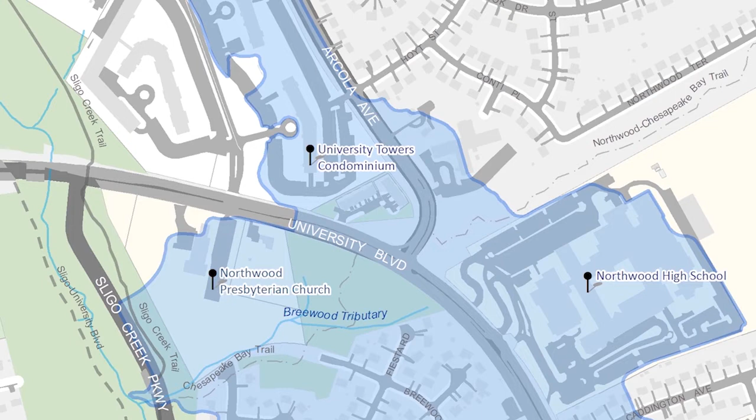In 2009, the Montgomery County Department of Environmental Protection embarked on a multifaceted effort to reverse decades of neglect and improve water quality and habitat conditions in a small tributary to Sligo Creek called the Breewood Tributary. Located east of Wheaton at the intersection of University Boulevard and Arcola Avenue, the Breewood Watershed encompasses 64 acres of high-density suburban development that drains into the Breewood Tributary.

Take a walk along the Breewood Tributary today, and what you will see is not at all how the stream looked just a short time ago.

A neglected stream. In 1951, the Breewood Watershed consisted only of farm fields and forests. The following 20 years brought big changes to the watershed. By 1970, the houses, high-rises, schools, and roads that currently exist were built. Development in the county during this time did not include stormwater management. Impervious surfaces like roads, parking lots, and rooftops in the watershed went from almost zero in 1951 to 26 acres, or 42% of the watershed area, by 1970.

Unmanaged stormwater runoff from these impervious surfaces flowed directly into the Breewood Tributary, causing an increase in the frequency of flooding and erosion of the stream channel. After 4 decades, the stream was severely eroded, with vertical stream banks as high as 13 feet. It's estimated that 2,667 cubic yards, or 267 dump truck loads of dirt, eroded into the stream channel during this 40-year period. On average, that's 1 truckload of dirt dumped into Sligo Creek every 2 months.

A little help from friends. Through a collaborative effort involving multiple partners that included Montgomery County Parks, Friends of Sligo Creek, University Towers condominiums, Northwood Presbyterian Church, and residents in the Breewood Manor neighborhood, DEP implemented 5 projects in the Breewood watershed to address uncontrolled stormwater runoff and poor habitat condition in the stream itself. The 5 projects are University Towers and Northwood Presbyterian Church Stormwater Retrofits, Breewood Road Bioretention, Breewood Manor Green Streets, Breewood Stream Restoration, and RainScapes Projects on private property.

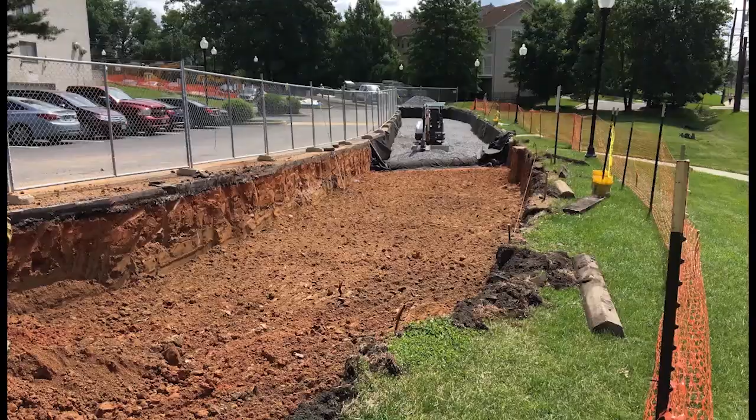University Towers and Northwood Presbyterian Church. Working together with residents at the University Towers and members of the Northwood Presbyterian Church, design plans were prepared for 13 small-scale stormwater management facilities. 12 facilities were installed at the University Towers and provide stormwater treatment for 3.7 acres of the 4.4-acre parking lot.

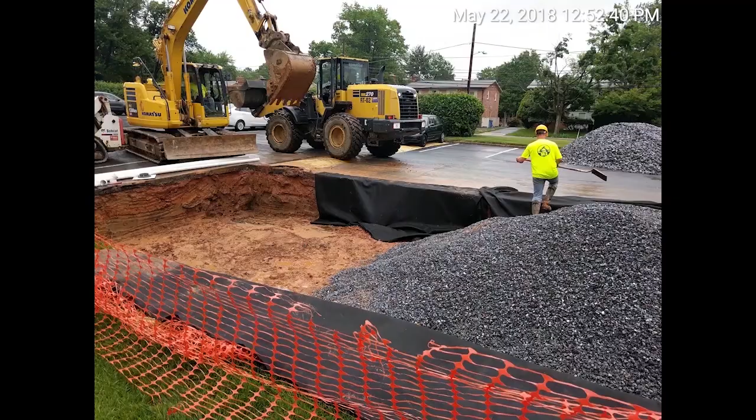Doug Marshall is the project planner with DEP and has worked on this project since the beginning in 2009. Excavation under the pervious concrete panels went to a depth of 4 feet and was then backfilled with gravel. An underdrain was installed to ensure water drains out of the pores in the pervious concrete panels, thereby preventing damage to the concrete from freeze-thaw action during the wintertime.

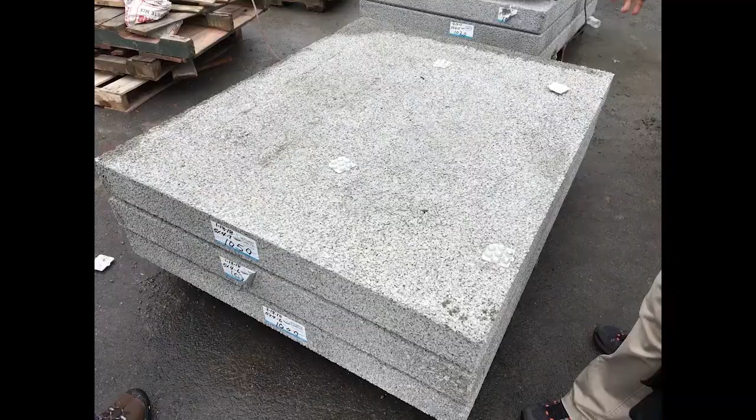The gravel reservoir under the pervious concrete panels has enough storage capacity to hold the full water quality volume, or 1 inch of rainfall over a 24-hour period. Our observations during the 2 years these pervious concrete panels have been in place have shown that they're performing well in capturing the stormwater from a total of 1.22 acres of parking lot pavement.

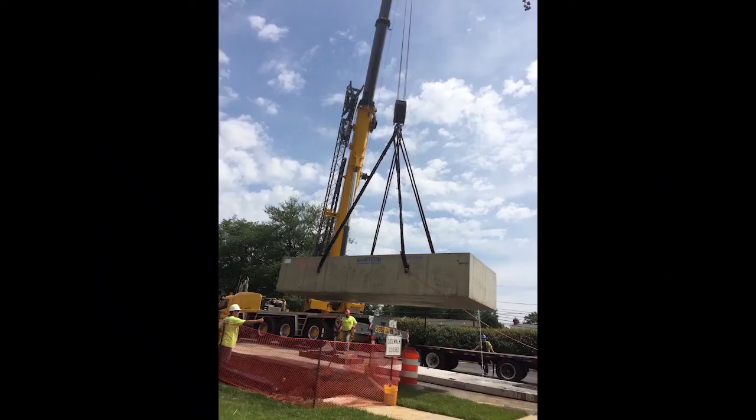6 tree boxes were installed at University Towers, which altogether provides water quality treatment for 1.9 acres of the parking lot. The impervious drainage area to each tree box ranges between 1/4 and 3/4 of an acre. Because of the relatively large impervious area draining to the tree boxes, we opted for a pre-treatment chamber to capture sediment and debris, keeping it from clogging the tree box filter media.

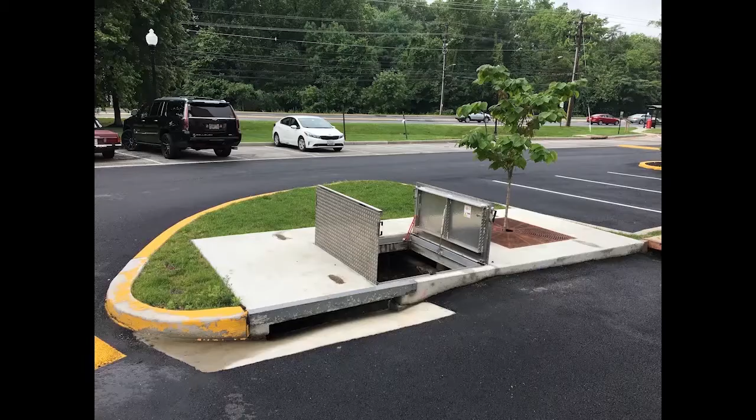Here's one of the tree boxes with the access doors to the sediment chamber open. Debris collected in the sediment chamber is easy to access and clean during routine maintenance visits. Through coordination with property management, we were able to have scheduled repaving of the parking lot delayed until after all LID practices were installed. When repaving did occur, we were able to include small modifications to ensure proper drainage to the tree boxes, such as the small concrete swale.

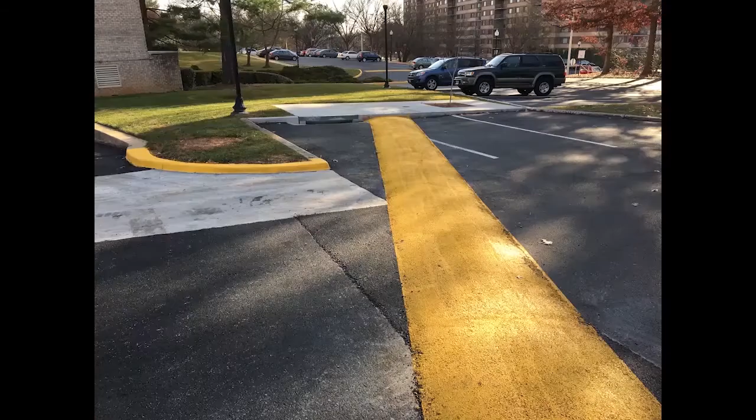Some of the speed bumps in the parking lot were relocated to direct stormwater into the tree boxes. In this case, we were able to have the speed bump installed at an angle to direct water to the tree box, which, as the video shows here, is working well.

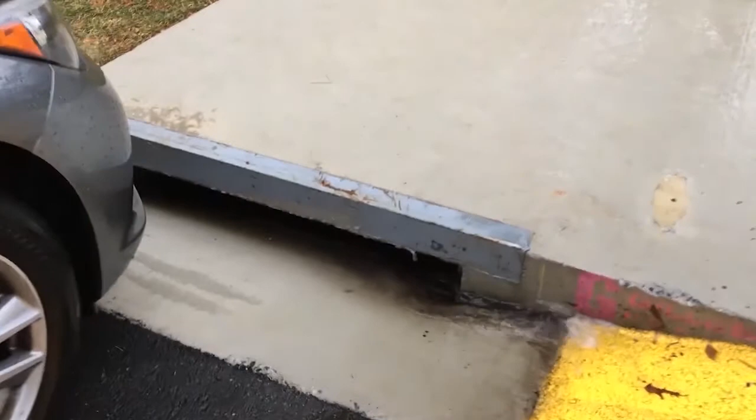2 bioretention gardens like this one and 1 rain garden were installed at the University Towers, which provide full water quality treatment for a total of 0.67 impervious acres.

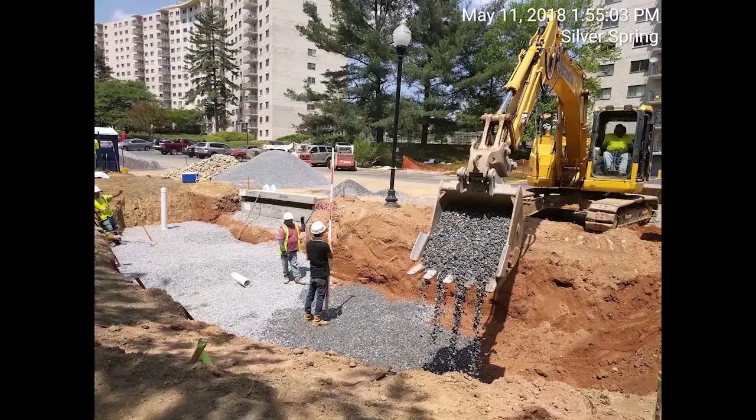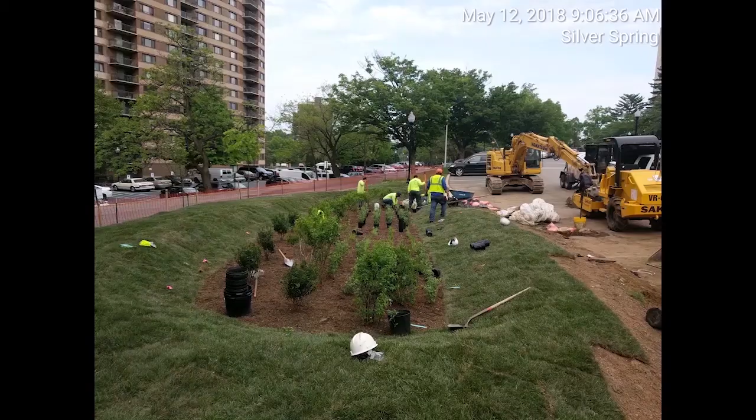Here, one of the bioretention gardens is excavated to a depth of 5 feet and then backfilled with 15 inches of gravel and 2 to 3 feet of soil media, comprised of equal parts topsoil, sand, and mulch. The bioretentions and rain gardens were planted in 2018 with 2 shrub species, inkberry and winterberry, and 4 herbaceous perennials.

Switchgrass, blue flag iris, goldenrod, and aster. This is one of the bioretentions after 1 year's growth, and this photo was just taken recently in June of 2020. Here's the rain garden after 1 year's growth, and here's the rain garden now in June of 2020.

LID offers a great opportunity to educate the public about stormwater issues. This is one of the signs that we post at our LID practices. This particular one is next to one of the bioretention gardens at University Towers, and here is one of our smaller signs posted next to the rain garden.

Moving on to the Northwood Presbyterian Church, where one bioretention facility was installed, providing stormwater treatment for the entire parking lot. The bioretention at Northwood Presbyterian Church has enough storage capacity for the full water quality volume, or 1 inch of rainfall in 24 hours.

Soon after the bioretention was installed, it was put to the test as we experienced a heavy thunderstorm that produced 1.1 inches of rainfall in less than 1 hour. The storm filled the bioretention to capacity and was just beginning to flow out the overflow riser. All water captured in the bioretention had drained down through the soil media by the next day.

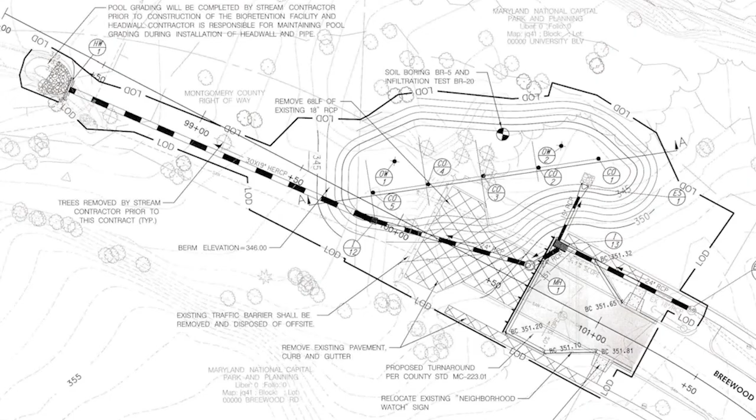To make space for the bioretention, 1,800 square feet of pavement was removed, as illustrated by the crosshatched area on this plan sheet. 50 feet of roadway was removed and a new cul-de-sac was constructed. Excavation was to a depth of 5 feet, which was backfilled with gravel and soil media.

Groundwater monitoring during the design process indicated the water table was approximately 10 feet below the surface. However, during excavation of the bioretention, groundwater was encountered, which forced us to make two design modifications: one, a perimeter drain was installed around the bioretention to keep the work area dewatered during construction; and two, upturned elbows were added to the underdrain to prevent lowering of the local water table.

During periodic inspections since the bioretention was completed, we have not seen water draining from the upturned elbows, indicating that all water entering the bioretention is infiltrating underlying soil. Ongoing flow monitoring in the storm drain pipe upstream and downstream of the bioretention should help us better understand the hydrology. These are the upturned elbows.

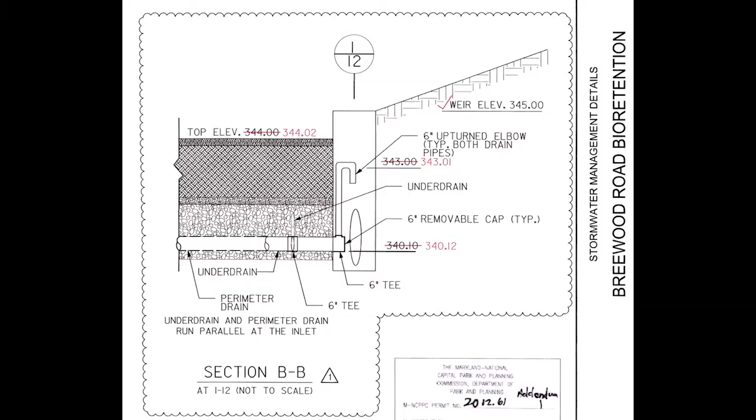Note the removable cap at the end of the underdrain pipe at the bottom of the concrete riser. This gives us the flexibility to dewater the planting media if standing water or soggy media becomes a problem. To date, after 3 years, we have not had a problem with the bioretention not draining properly.

Plant growth in the Breewood Road bioretention has been exceptional, as this series of photos shows. Several large canopy tree species were planted in the bioretention, including sycamore, swamp white oak, red oak, and river birch, which are helping to dewater the soil media.

Signage explaining restoration efforts in the Breewood Watershed is posted alongside the Northwood hiking trail, which passes by the Breewood Road bioretention. Construction of this project was completed in May of 2017.

Breewood Manor Neighborhood Green Streets. 10 bioretention and rain garden facilities were designed and installed within the public right-of-way along Breewood Road, Fiesta Road, Tenbrook Road, and Tenbrook Court. Combined, these 10 Green Streets practices provide stormwater treatment for 1.8 acres of impervious surface.

Ann English is DEP's RainScapes Program Manager. I am going to talk about Breewood Manor's Green Streets Gardens renovation and the residential properties that were done through the RainScapes program. When the initial work was done on Breewood, there was quite an extensive amount of analysis, and the effort was to see how much runoff from private property could be diverted into some sort of green infrastructure RainScape garden.

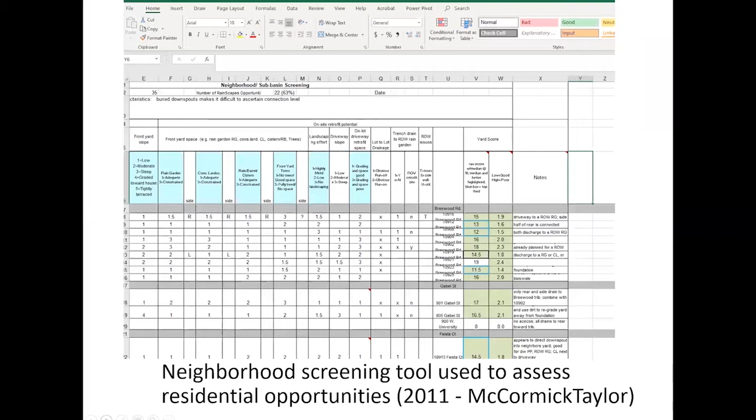An extensive screening tool ran the numbers and figured out that 63% of the properties had opportunities. Unfortunately, we got a much lower percentage of participation because it was an older community, and it really was like cold calling. They didn't know they had a problem, or they thought they might want to move.

They weren't anxious to make landscape changes, but we did manage to get 3 properties to agree to allow us to install gardens. I'm going to show you that gardens looked one way when they went in, and then some of them have gotten better over time and some have not.

This garden is adjacent to the big bio in Breewood, directly adjacent to it, but it gets a lot of deer pressure because it's right next to the stream, and stiltgrass has really invaded this. In spite of that, the mountain mint has done all right, and so have some of the other wood asters that bloom through the stiltgrass.

We miniaturized the trench drain used in the road in Breewood and put it on a driveway and into this rain garden in the front yard, which is highly visible and is across from several different gardens in the right-of-way, which we then retrofit back in 2017 after the initial 2014 installation.

This garden is well loved, but the owner has now moved the native plants we installed to the background and installed a fig as well as hostas, which he prefers in the rain garden itself. They are growing fine, but there probably should be higher plant density than he is allowing.

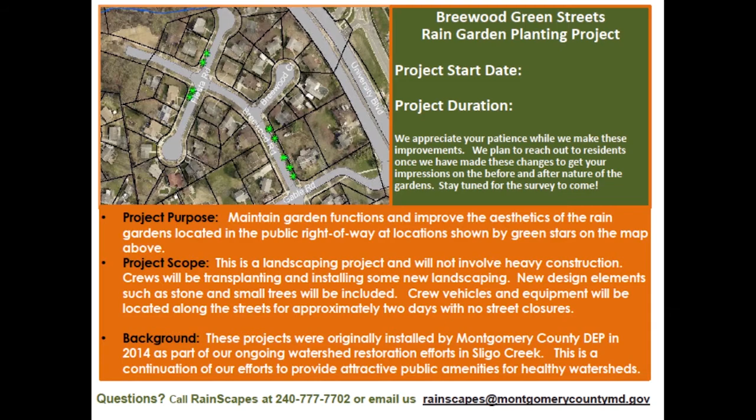This was done very rapidly. We started in April and May of 2017, and by the end of May the gardens were renovated. We sent out a flyer showing people where it was going to be, which gardens were going to be renovated, and proceeded from there.

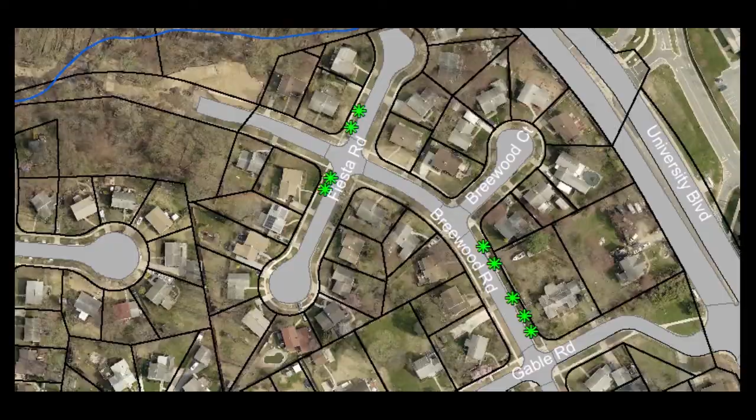The initial garden was selected even though other gardens might have been in rougher shape—these edges were clean, but the vegetation had been eaten by deer. It was in very poor condition in terms of providing green cover rather than mulch cover. The steep side slopes were being undercut, the sod was starting to collapse, and that didn't look like anything people like to look at in winter. The standpipes, which were observation wells, were very noticeable, and people would prefer they had some winter interest.

So we went with 3 different garden ideas. One, which I will show, I'd call suburban stream valley. The second would be a classic garden. And the third, a novel idea, was really trees—to create a streetscape and see if we could, with ornamental trees, create something more appealing without breaking the bank.

These 3 approaches were developed in-house by the RainScapes designers, my planners and myself, and then we got to work. This was Fiesta North, which I'm calling Suburban Stream Valley because it was very close to the stream, in a very suburban setting, and it was going to be a little more casual. The edges were still going to have a step out of grass—we weren't really modifying the slopes, but we were going to take off some of that sod and reinforce it because it was collapsing in a number of places.

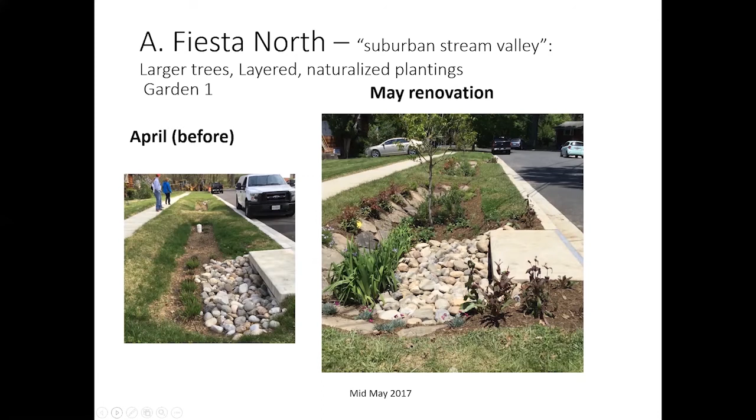We armored the slope where we took out the sod, and then we added evergreen shrubs and evergreen ground covers interplanted in those stones, creating a green living layer on the bottom. We also moved the sod away from the edges of the inlet so it wasn't so hard to mow, creating a garden edge rather than a hard edge.

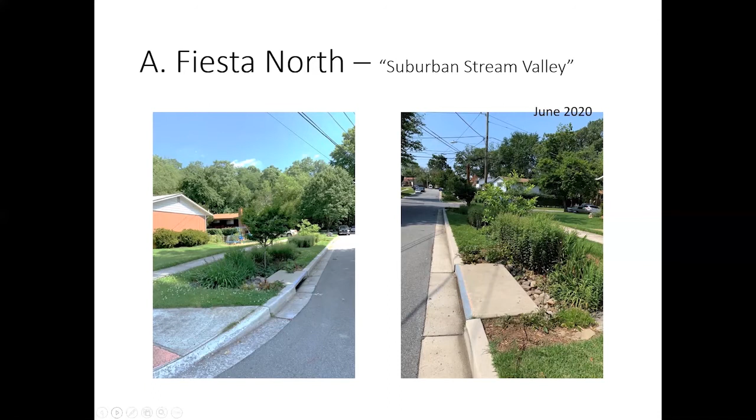This suburban stream valley concept has filled in beautifully. The trees have grown well. We used a hackberry, and you can see the Magnolia virginiana—so we used bottomland plants. We used goldenrods and rudbeckias, and it's really full after 2 years, which is a big contrast to what happened the last time after 2 years.

Just across the street, Fiesta South, is a classic garden. So you have these 2 gardens that were installed very separated from each other. They had to step out. There was some erosion on the grass, and the shrubs were small, and there was a lot of open space. Even though it was clean, it wasn't very well covered.

So in April, we got to work, and the goal was to unify this and turn it into a unit, to make it a garden that would be set off. So there's a layering system that was designed in. And again, we used the idea that the inlet would have irises like on Fiesta North, and the inlet edges would be garden-esque rather than turf to concrete.

And then the biggest thing we did was add in these flagstones to make a pedestrian connection from the road to the sidewalk, rather than forcing them to walk through grass, allowing them to feel like they're walking through a garden rather than avoiding falling in the pit.

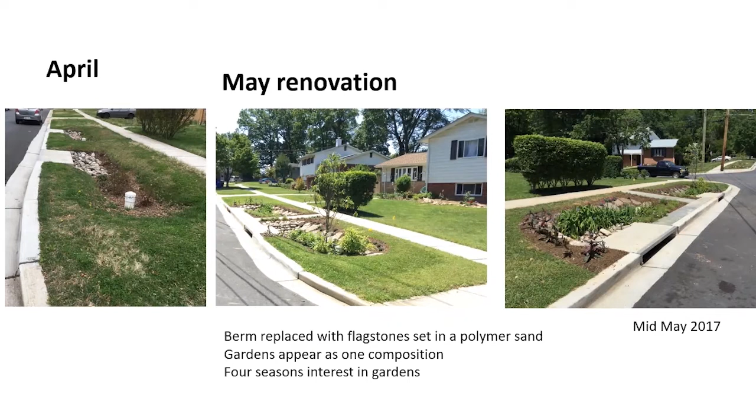In June of 2020, these gardens have done spectacularly well. They create 4 seasons of interest. They have beautiful flowers, and in the winter, there's something to look at. This was a fairly low-cost renovation for a big, big impact. And actually, there are some really high-quality weeds coming up between the flagstones—some of the penstemons have decided they like to grow there too.

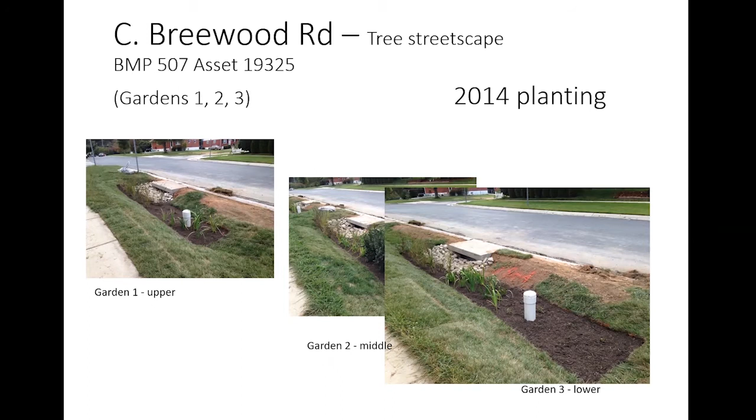So then on Breewood Road, there are 5 gardens in a row, and they were all very steep and narrow. We did not reinforce the slopes with stones because that sod seemed to be in pretty good shape, but you can see this is how they were planted. And then the gardens in 2016, they actually didn't look terrible, but they were starting to get more and more sparse, so every year replacement plants were having to be added.

Some of the shrubs had survived, and so we were really trying to figure out, what's my problem solver? How am I going to get through this? So what we did was we added trees. We had never added trees into rain gardens before, and we knew the bottom was going to be an issue, so we put them on the side slopes.

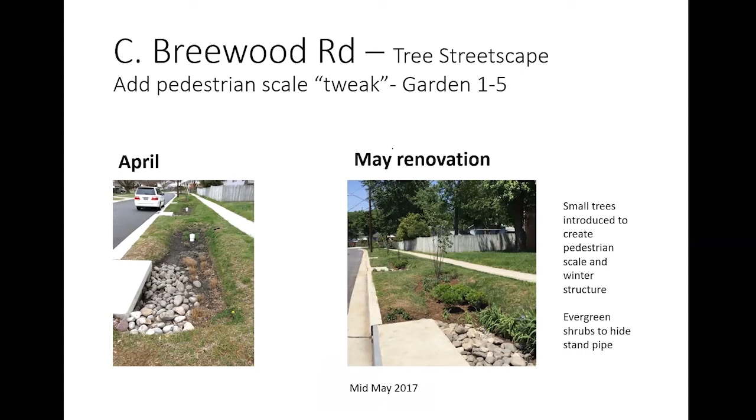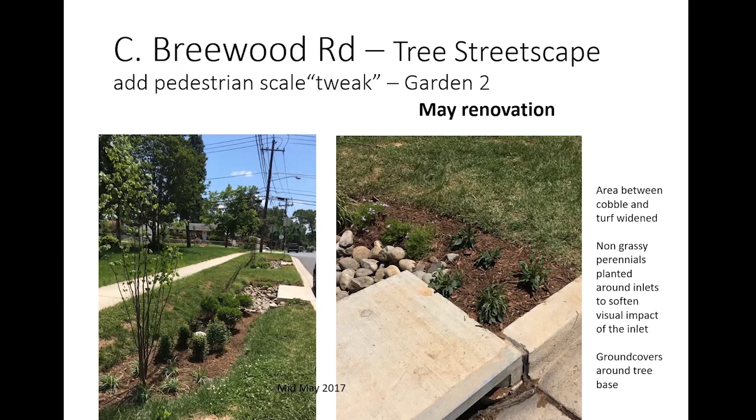We created a repetition of patterns to unify the whole streetscape. So rather than be just a muddy mess for about 2 months of the year after the grasses got cut back, we alternated switchgrass and irises down the road. We had 3 redbuds and 2 serviceberries as the trees, and we also used some Ilex glabra, and added in sedges. We added dwarf cultivars of black-eyed Susan, trying to create a feeling of canopy along a very open, sunny street.

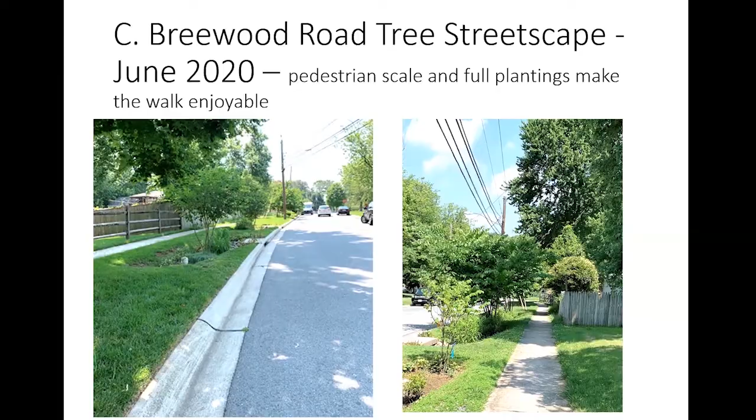So now in June, the pedestrian scale has been introduced. It's a pleasant walk. There are pockets of shade created by the new trees that are filling in nicely in the garden, and the ground layer is complete. We feel that between the residential areas and the streets, this has been a big uplift for the community, and we hope to do more work in many more neighborhoods.

Construction of the Breewood Manor Green Streets was completed in May of 2015. Breewood Stream Restoration: The Breewood Tributary originates from 2 stormwater outfall pipes that convey water from University Towers, Northwood High School, and University Boulevard. Following decades of high flows and erosion of the stream channel, new stormwater management in the Breewood Watershed began to offer relief.

In 2010, the renovation of Northwood High School brought new stormwater management facilities that provide treatment for 9.3 acres of impervious surfaces on the high school property. Combined with stormwater retrofit projects implemented by DEP, a total of 17.3 acres, or 65% of all impervious surfaces in the Breewood watershed, are treated as of July 2018. This level of stormwater management offers good protection against further erosion and degradation of the Breewood Tributary.

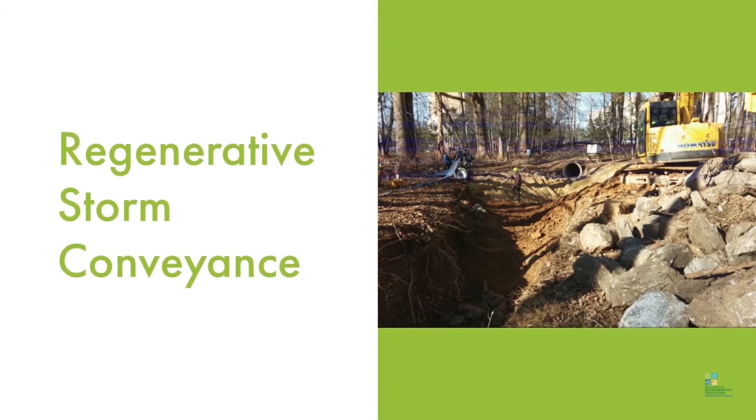The Breewood Stream Restoration Project followed a design approach referred to as regenerative storm conveyance. The idea behind this approach is to promote the seepage of stormwater into and through a porous substrate comprised of soil, sand, and wood chips. Through this process, pollutants are able to be filtered out.

A series of pools and riffles were also created to improve aquatic habitat. During and after storm events, water flows through the pools without eroding the stream channel. The stream banks were seeded with a mix of grasses and perennials to provide stabilization. Additionally, 315 trees and shrubs were planted throughout the 1,200-foot-long project to further stabilize stream banks and provide wildlife habitat. Construction of the Breewood Tributary was completed in May of 2015.

A reason to celebrate. On June 8, 2019, nearly 10 years since the effort first began, a group of residents joined dignitaries from Montgomery County government, Metropolitan Washington Council of Governments, Friends of Sligo Creek, and Northwood Presbyterian Church to celebrate the completion of this significant environmental project that provides cleaner water for current and future residents of Montgomery County.

In addition to being inspired by the speakers, those in attendance were provided with the opportunity to do a walking tour of the Breewood Watershed to see and learn how the new stormwater management facilities work to manage and clean stormwater runoff. Sligo Middle School LID Retrofit.

DEP has installed LID practices at 11 schools throughout Montgomery County, all of which provide excellent opportunities for students to learn about stormwater management issues, as well as our local streams, rivers, and the Chesapeake Bay. Several teachers from these schools have reached out to DEP and asked for staff to visit with students and explain the purpose behind LID practices and issues related to stormwater runoff. Feedback from teachers and principals at these schools has been very positive and confirms the educational value of LID practices on school campuses.

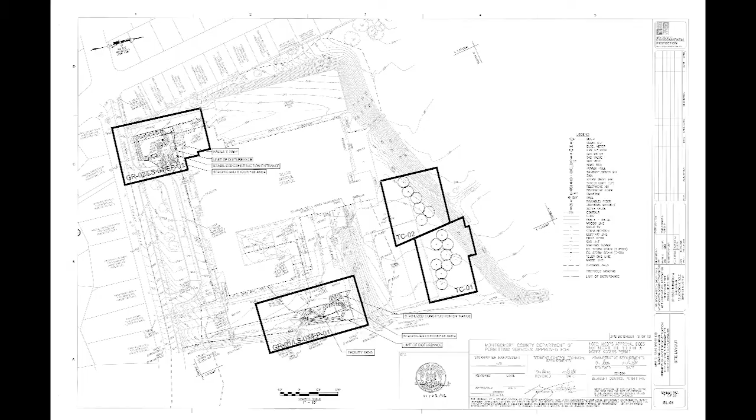This bioretention captures 0.2 acres of the parking lot on the east side of the school. And this bioretention captures runoff from the entire 0.8 acre parking lot on the west side of the school, just around the corner of the school in this picture.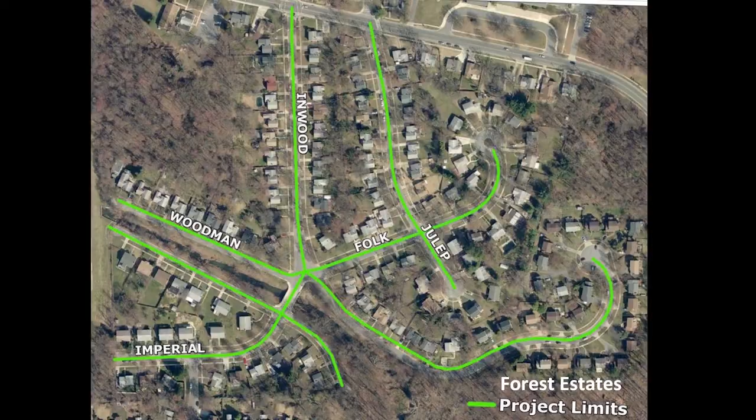Forest Estates Green Streets and RainScapes. This was our first Green Street effort in the county, and Green Streets and RainScapes worked together side by side to try to retrofit a very challenged drainage situation. This is in the Anacostia River watershed, and it is slightly downstream from the Breewood area.

Forest Estates right of way and RainScapes look like a nice streetscape, like a cottage garden in some cases, and there are many places where people now love them, even though it was a challenging effort to get them into the communities. It was really like cold call, door-to-door salesmanship on the residential front. There was a lot of outreach, community walks, and a lot of concern because the right-of-way was narrow.

That same rain garden has really gotten overgrown in a way, but the residents like it that way. What you have to understand about a rain garden is that in a residential setting they're very personal, but when you're in the right of way, these gardens grow. They get a lot of water and the plants really take off. So you really have to plan for that when you're doing planting design in the right of way.

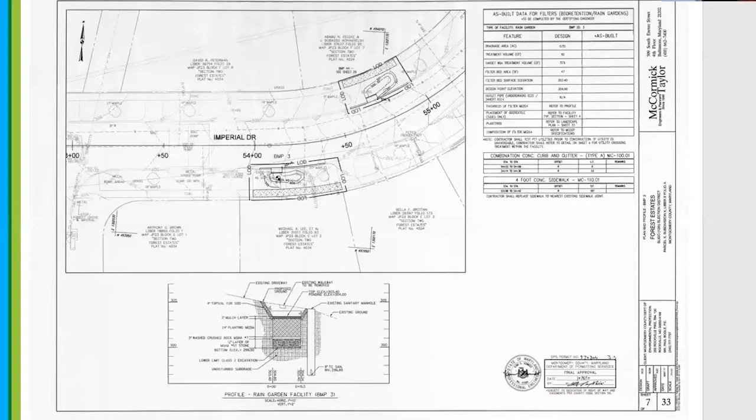Maintenance is done on these gardens once a month, and it is done by our crews that are established through our contracting mechanism. And this was something that was a big concern.

Some of the gardens required augmentation and additional plantings. The plantings have gone in, and we've tried a variety of strategies. Initially, it was just adding more plants. Over time, we've adapted and learned which plants are too aggressive and which ones are not strong enough. And when these problems have arisen, we've been right there to fix them.

This went a long way to building community confidence. Initially, there was a lot of skepticism. Our planners went out and put lights on them for people before trick or treat, so the kids wouldn't fall in them. The staff really went out of their way to make this a comfortable experience, and now the community really likes them and talks about them.

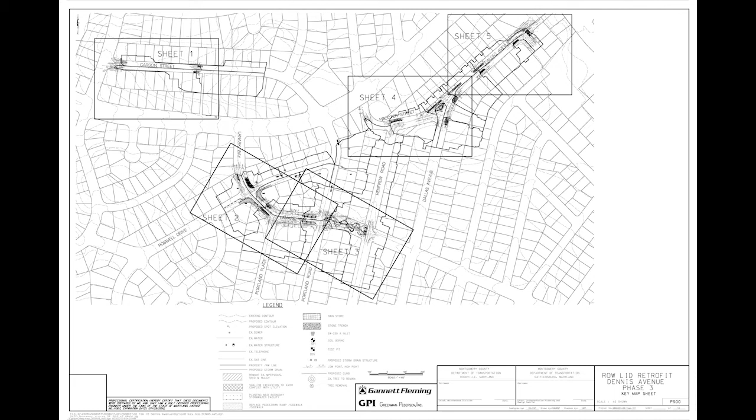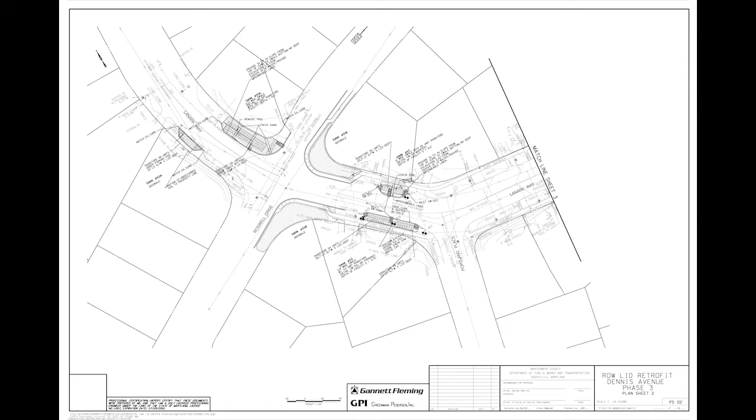Because it was so extensive, we had to develop a whole series of special details, including inlets, curb extensions, and a biotrench profile—all in a 28-page document specific to Dennis Avenue. Here are some sketches and detailed technical drawings done to highlight for each project where the curb cuts had to go, where the bios had to go, and where we were going to adjust the intersection.

Again, we had outreach materials created. The Green Streets in Your Neighborhood pamphlet was designed specifically with pictures of other Green Street projects we had built in the county. We had community walks where people could walk and talk and voice their concerns, and learn about the planting designs and the design-and-build process.

These are very successful gardens over time; they actually managed to stand up to the pressure. The iris filled in and the juncus filled in, but the switchgrass hasn't persisted as well as the other plants. Even in late summer and winter, this simple plant palette creates a sense of identity along the street. And in June, it's really spectacular when the iris are blooming.

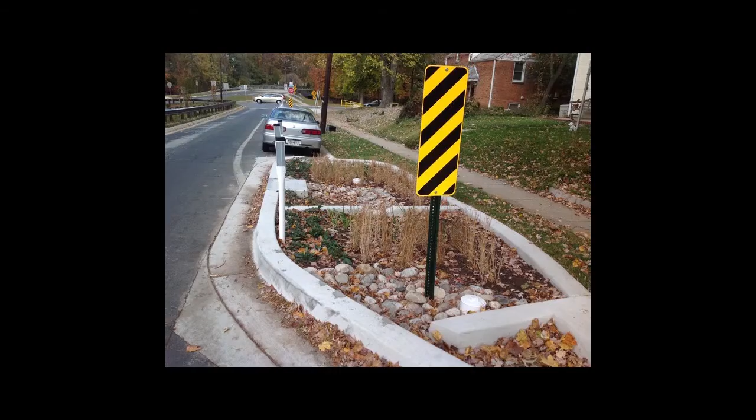Here's another shot down Dennis Avenue right after pruning. I want to draw your attention to where the leaves are piled up in front of the sign—that was a special inlet design, and the goal was to reduce sediment getting into this bio. It's somewhat effective. It has a flat concrete bottom and can be shoveled out with a number 2 shovel, which is nice for the average maintenance crew, since they usually have a flat shovel.

You can see how the sediment is made to pause because it drops down onto a flat surface before it's allowed to go into the bio. The check dams are concrete in this situation, with cobble down below the first one—so the most highly impacted check dam is reinforced.

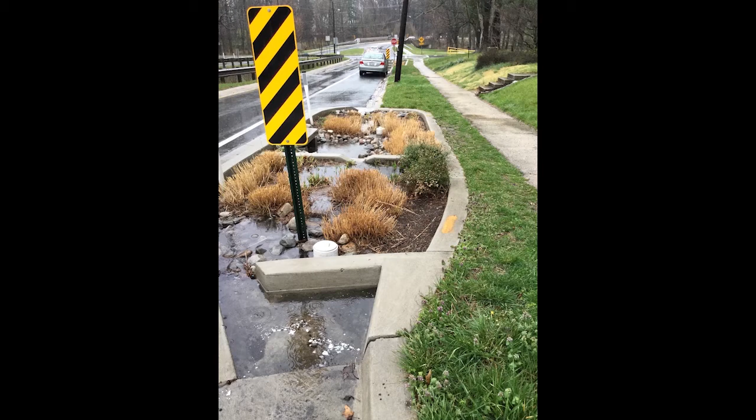Some other challenges: we had a big median with the storm drain in it, and you couldn't change the elevation of the storm drain. So one solution was to acknowledge there would be a hump in the middle, and create one U-shaped cell to capture water in this median, which was previously just a mowed grassy median with some trees. Now you have quite a display of evergreens and florals down the median almost all year round.

In the fall, the community needed better visibility. There's another example of that inlet that's designed to drop sediment and that you can clean.

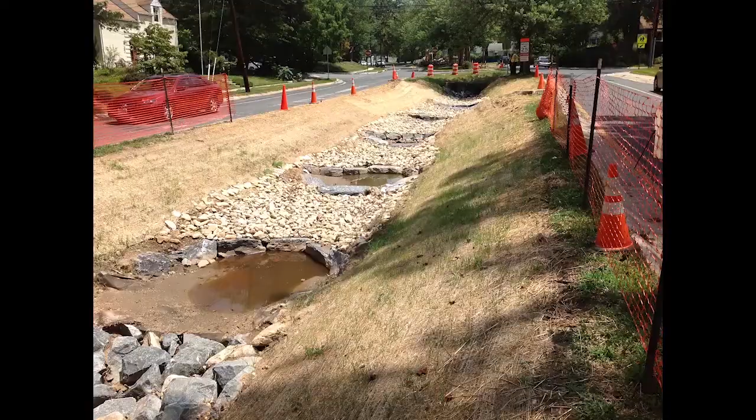And then at the bottom of the median was something innovative that we were trying, which were step pools. These were not as successful initially as hoped. There's been a lot of adjustments to the pools themselves because they were causing standing water problems. The vegetation was slow to establish, but over time there have been ducks swimming in there. The vegetation is establishing, and it seems to be working well.

The final project I want to talk about is the sinuous swale at Lanark Way. It's a BMP 56, and it's really turned out to be a community unifier. We used our same story of stormwater sign that we've used on other projects, and the community went one better. They added their own neighborhood basketball hoop for all little and tall to have a ball. And this is stormwater management at its finest because it's really achieving that multiple benefit that green infrastructure is supposed to achieve.

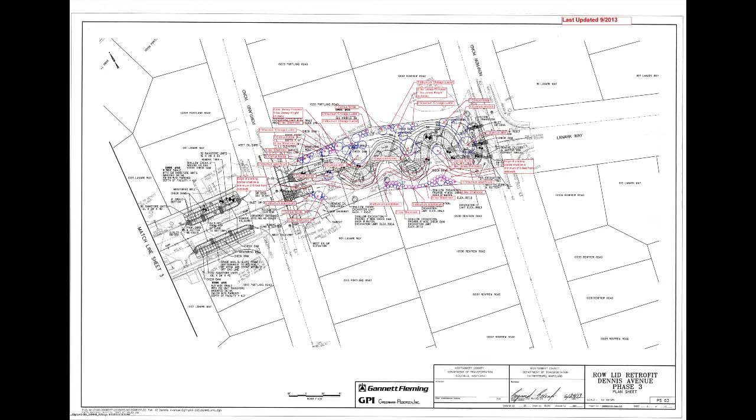It was not an easy project to fit. This was a paper street, an abandoned right-of-way that wasn't being used. So retrofitting in the swale, lengthening the flow path, gave maximum opportunity for water to soak in and be cleaned by plants as it was flowing down the swale, and it has proved to be very successful.

I want to draw your attention to the fact that once it leaves the swale, it goes under an outlet across the street and then back into another rain garden on the right side of the road, which is kind of cool.

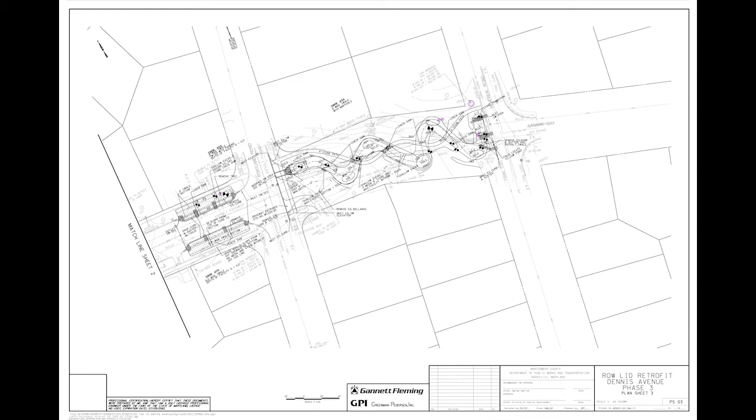Some of the plantings in there are very lush, but one time the maintenance crew went out and said, man, that looks really great. Then they realized it was cogon grass, which is a horrible invasive - it's the beige grassy tuft. So all of that had to be ripped out. We went on a field trip with one of the nurseries that has done a lot with green infrastructure, and we had a really good educational experience both for them and for us, because they had never seen something so fully successfully planted functioning in a community.

The other thing that was added to this swale is that sidewalk. It's a porous concrete sidewalk, and that was a new idea when it was put in back in 2014.

So this previously unused space is now valued and protected by the community. They don't want pet waste just dumped on the side of the road. They've gotten our signs that say there's no such thing as a poop fairy. They take walks on it, they congregate there. And this is treating 1.62 impervious acres at a very reasonable cost per impervious acre for a retrofit. The check dams control the flow and allow that water to infiltrate, creating a beautiful scenario for the neighborhood.

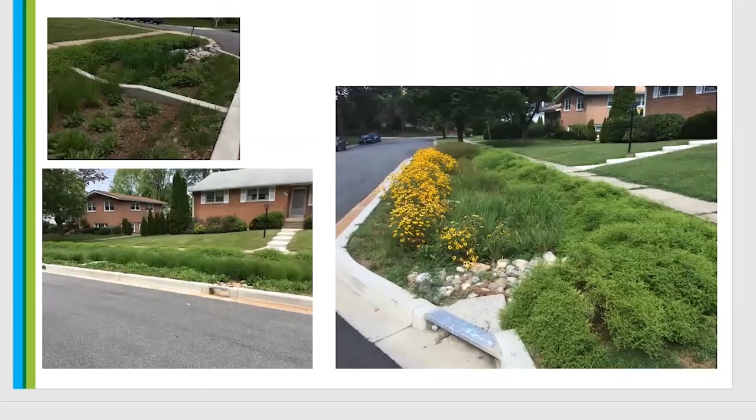Implementation of the LID practices highlighted in this video and many others would not have been possible without the dedication of staff at the Montgomery County Department of Environmental Protection, who work through many obstacles that stand in the way of bringing a project like this to fruition. The projects highlighted in this video are just some of the many completed to date within the Anacostia watershed that demonstrate Montgomery County's commitment to improved water quality in our local streams and in the Anacostia River.